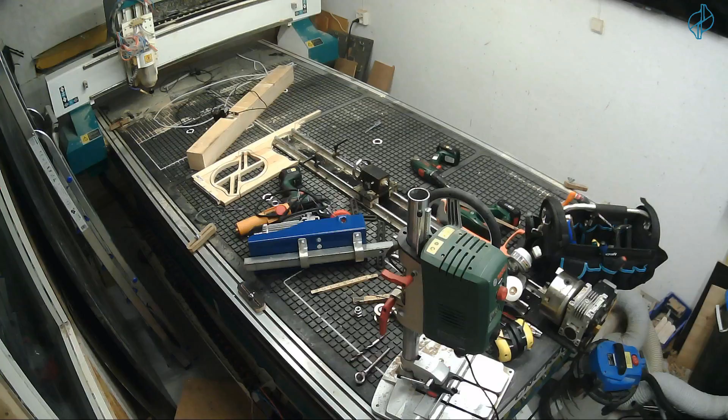And this is my CNC machine at the moment. It's kind of messy right now, but it's a huge CNC router. It's able to cut sheets of wood, plastic, or aluminium with the size of 2.4 by 1.2 meters, and 20 centimeters height. So it's able to cut pretty large objects. That comes in handy when you're making furniture, because you want to use an entire sheet of wood or plywood, or MDF or something, and then you can make huge objects very easily.

So let's start fooling around a little bit with the CAD program first, and then we are going to go from Fusion 360 over to the CAM software. First we draw it in CAD, then export it to a program called the Slicer. Then we take the DXF file we get from there and import it back into Fusion 360 and make the CAM files, the tool path for the CNC machine. Then probably tomorrow or something, we're gonna cut it out on the CNC machine. So let's go all the way from an idea to a real life object this time.

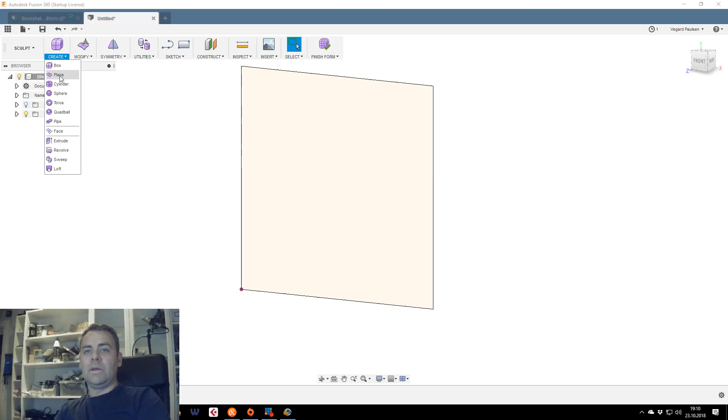So we are able to decide at a later stage what this object is going to look like, but for now let's just keep it at 80. I'm going to use a Sculpt tool called Create Form, and then I choose what I am going to draw inside. Now let's make a plane first - a 2-point plane.

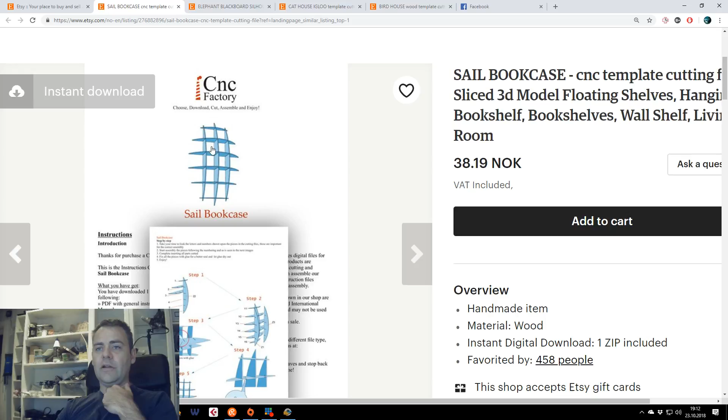So we are going to make a bookshelf. Let's find a bookshelf that's kind of similar, so you can get the idea. I'm kind of inspired by these kinds of structures—very nice bookshelves. They're pretty easy to make because they're made of interlocking sheets of plywood, so you don't need any screws. You can see in these drawings they just slide into each other like puzzle games. It's a nice, cool thing to make with a CNC router.

This is definitely made within the same program, probably the same way as I'm going to do it today. You can see these screenshots are actually from the Slicer tool in Autodesk, so they're basically doing the same as we are doing right now, except they're actually paying for it. I'm not. So let's start off

with, for example, a box, or I really want to have something with beveled edges. Just looking for a tool here. Yeah, let's go back to the first way of doing this. So I'll just draw a box, 80 by 80 centimeters wide, and that's, for now, going to be the size of my bookshelf.

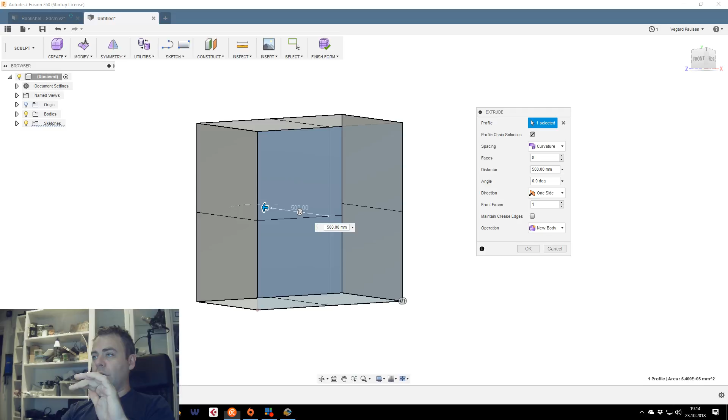I made a plane inside that sketch just to keep the dimensions, and now I'm going to extrude that plane into a box like that. I want that to be maybe no more than 50 centimeters in depth, because the bookshelf, at the deepest point, is going to be 50 centimeters from the wall.

All right, I'll just extrude that, something like that, and let's close up this hole. So we just select this and do one of these. I had some trouble earlier with one of them. So it's a closed box now.

Let's go to this side and maybe do some cool stuff—let's do bevel edges maybe, if we can do that inside. Merge edge. Bevel, there you go. So I want to bevel these edges.

The Sculpt tool is the tool I'm the least familiar with in Fusion, so this is very good practice anyway. Let's see if we can find a way to bevel these edges.

I know another way, but we can see if we do like this and edit form, and if we now scale this—it's really not doing what I want. I tried this an hour ago and it worked perfectly. That's how it is, there's always something.

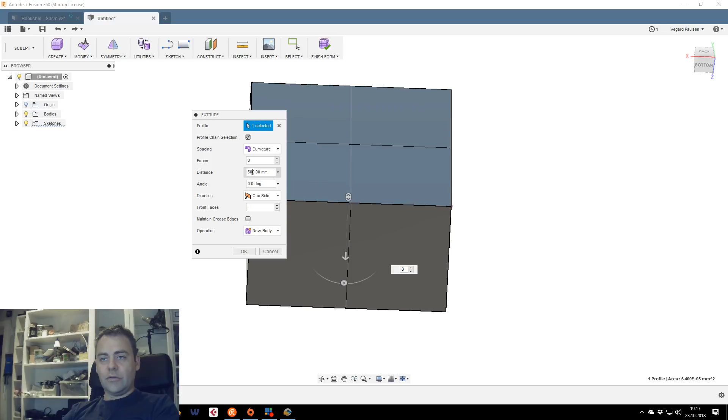That's how I did it. So I should really go back to before I extruded it. I went like this—I'll just extrude it a couple of millimeters first, so I get the spacing from the wall before I start the curve. I'll go, just for the fun of it, maybe 5 millimeters, like that, and then close up the back wall before I continue, because that's gonna make a mess.

If you have a form that's not closed up, when you try to export it, you will not be able to. So I will fill the hole, select the back wall, and do some sort of collapse maybe—yeah, that will work. Now I will take the front wall, do an edit form, and push the center point of the sculpt out to get the curvature I want.

I'm looking for the biggest movement right now, should be 300, should be like 450. It looks a little bit too much. Yeah, let's just try that for now.

And to get this to be a little cooler than just, for now we can actually just export this as is and see how it handles up with inside the slicer. Hopefully it will work.

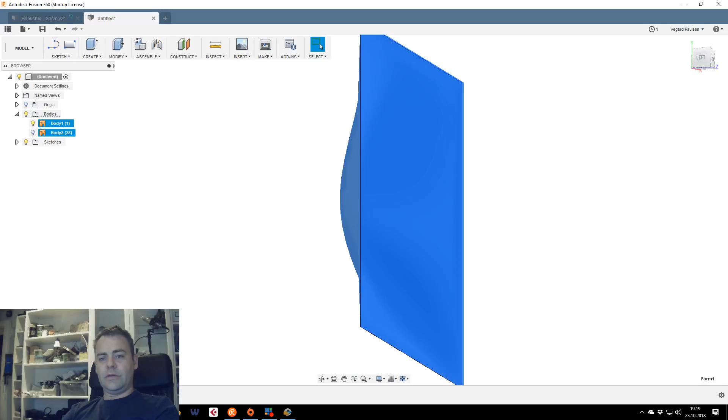Let's just try another time and close up the back wall then without that extrude. Fill hole.

Just have to check that my Facebook chat is actually showing up as well. Having some trouble with that today. So we are definitely live on Facebook, but there's no chat right now, but I'll just share this around it. Yeah, hopefully I will see if there's any more questions during the stream.

I really want to close this, but I wonder why I can't. Maybe I can do it now. So...

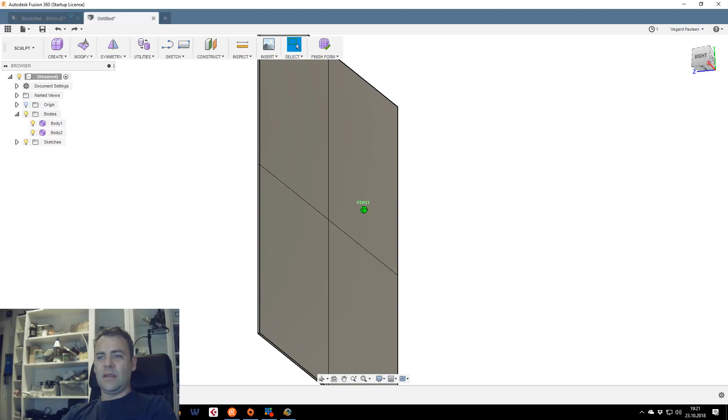When you do these kinds of modeling, there are better tools than Fusion, because Fusion is really made for technical drawings and sketches. It's really not made for soft modeling. As you can see, it kind of messes up pretty fast.

So, edit form. Let's go 45, maybe 50 centimeters. Let's go 50, yeah. So, and then let's close up the back wall.

Fill hole. Fail to fill hole with a given edge. That's interesting. Is that because the sketch is also visible? Maybe. Fill hole. I'll turn off the sketch. No, still the same problem.

So, this is weird. So let's start over. Let's start with the sketch.

Let's create a box, 2 point. Select which, these yellow boxes tell you which plane you are going to draw on, because you can only start on one plane. So I'll always start at the front plane, because that is how my CNC machine is set up.

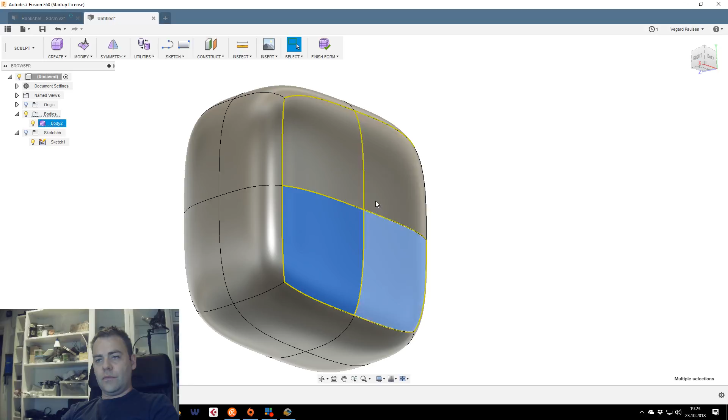See if I go, I can just select all and go - oh shit, I missed it. Let's just try this and go flat, flatten, 9 selected. Okay, nothing happened. Interesting.

I'm using the crease function instead. That will give me a proper flat back wall. Looks like. So now I'm almost there.

Now I can just work with my design to kind of give it a little more cooler look. Something like that maybe. Yeah, let's just see how that turns out before we go further.

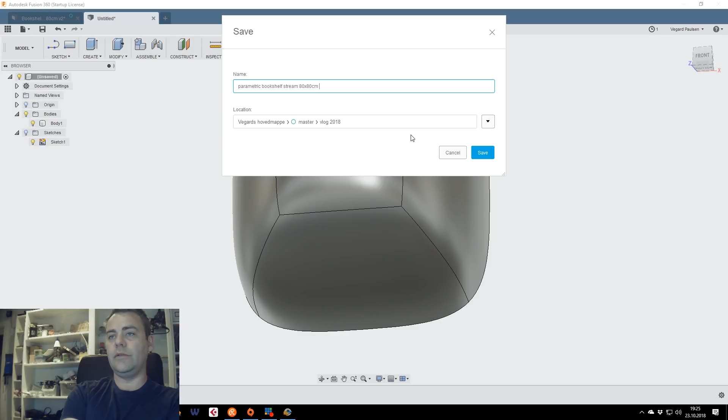So let's just call this parametric bookshelf stream. 80 by 80 centimeters times 50 centimeters, I think it was.

So, and now we go make, and then we go slicer. You have to download this slicer tool separately. It's available in the plugins page on Autodesk. You can see, you will find it somewhere.

So go make slicer, and then it basically generates an STL file with these settings, and it opens up the plugin, and hopefully it will import it properly.

Yeah, like that. So, and the first thing you should really look at is on the left side here, you can actually see that it's the size. It's actually trying to scale it as a default, and that's kind of dangerous.

So we're gonna keep the original size, and we're gonna use it in centimeters. 800 centimeters - that's a huge bookshelf. So let's go millimeter, 800 millimeters. Yeah, that looks more right for us now.

So we have our shape. It looks kind of boring right now, but it's going to be much more awesome very soon.

So, and the next thing we need to do is during manufacturing settings, you can construct a manufacturing setting that chooses the size of your material, the size of your sheet, like a wooden sheet for this CNC machine I have over here. It has a work area of 2.4 times 1.2 meters, so you can actually put a plywood or MDF sheet of that size directly onto that machine, and you can set that up in the software here.

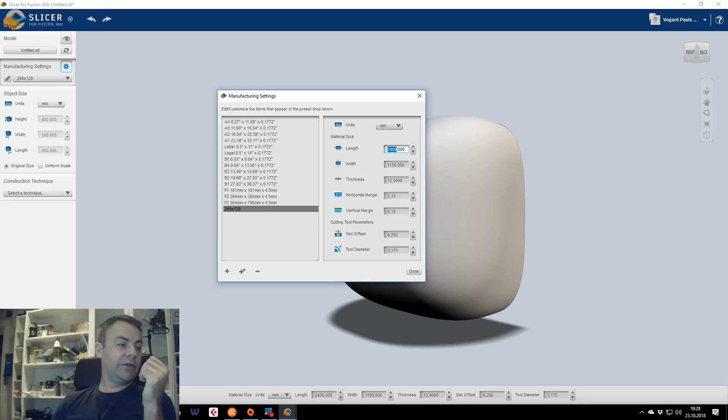Reese, I'll probably mill it tomorrow. As you can see, my CNC machine is kind of full of other stuff at the moment, so I need to clean it up and put in a large plywood sheet. I'm definitely not finished with the software part for a few hours, so I'll probably mill it tomorrow, hopefully, or the day after that. I'll try to let you know.

So 2.4 meters times just under 1.2 meters, and the thickness of the plywood sheet we are going to use is 12 millimeters. That's pretty important because it kind of decides how big the slice in the interlocking slice is going to be. Then you have the tool diameter, and I'm going to use a 3.175 millimeter bit to carve this out, and then I'm going to save it.

So now this slicer is ready to do some work. The first thing it tries to do is slice everything sideways. This is very cool if you have furniture you want to make where, let's say, you put spacers between all of these layers. You know, these are layers - I can show you, you can see all of the layers going off. You can see the blue lines at the top, that's where you can make holes, for example, for either a rod or a wire or something that holds all the interlocking slices together.

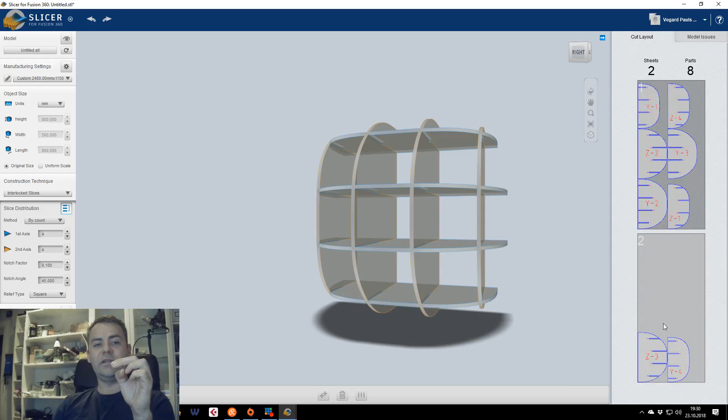So these slices, now it's looking like a bookshelf, right? So apparently, if you see on the right side here, you can see that it's using 2 sheets of plywood to mill out 8 parts. Those 8 parts are now ready to be interlocked.

Interlocking is when, if my one hand is going like that and it has a slice in it, and the other hand has a slice the other way, they kind of fit together, and then it's rigid. It's very rigid, and you are able to mount it without using bolts or screws or anything.

So as you can see now, this is the instruction manual on how to assemble it. You start with that slice and that slice and that slice. You can also see this is cardboard, where you can see the plywood version. This is very close to how it will look like when it's finished, because I'm going to use birch plywood, and that has a very similar look to this.

And you have a good question - it's very feng shui, yeah. It will be mounted onto a wall, and that's the last part.

After I'm finished with the design, I will have to take these DXF files on the right side here and put those back into Fusion 360 the hard way. I have to import the DXF, then extrude it all over, then draw all the holes for the mounts, because this program is only made to do one thing, right? It's made to slice up your 3D objects into sheets. It's not made for CAD drawings, it's not made for CAM. Its only purpose in life is to slice up things in very cool ways, and it does that very well.

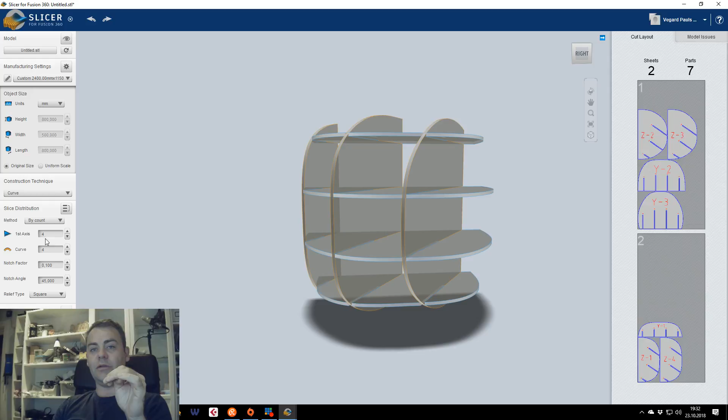But it's kind of a... One thing I was really missing when I started working with this was a way to actually send it back to Fusion and keep all the 3D parts without doing it the hard way through the DXF. But well, you can't have everything. So this is another shelf.

It will be very hard to get to the back shelf. With the back here, it's kind of hard to reach whatever you want to have in there, unless you want to hide it. In a way, it's kind of nice to hide.

You can actually rotate everything as you want, and if it goes red, then it says we are not able to assemble or mill this out without messing it up. So let's go interlock slices, and of course you can change where everything wants to be.

So we can go by distance. You can...

One thing I definitely want this to be is milled out in one sheet of plywood, because one sheet of furniture quality birch plywood is kind of expensive in Norway. It's like less than 50 euros, so maybe 45 euros or something.

So if you're going to use two sheets of plywood to make one bookshelf, it's going to get expensive. A hundred euros just in material, and then you have the work time, maybe an hour of milling, then the assembly, and probably you have to paint it somehow, maybe a clear coat or a color. It kind of gets expensive very fast, but at least you're going to get the design you're looking for, and that's definitely going to cost more than any IKEA design.

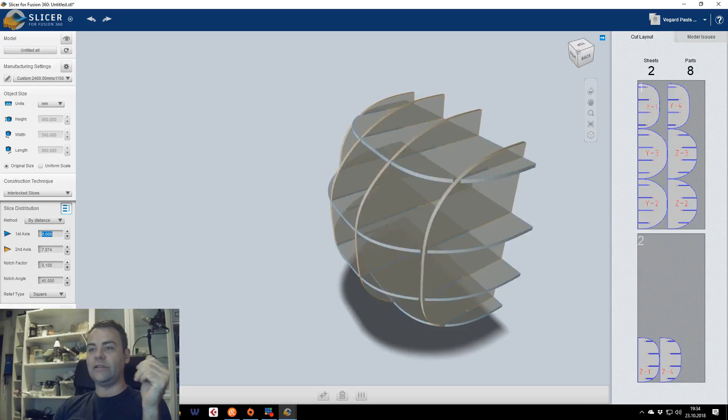Yeah, custom is always custom. You will not find this on IKEA, at least not this design, and custom will cost more. People kind of struggle to understand that, because they're so used to paying so little for furniture. So as soon as they start talking about making custom stuff, it's like, wow, is it that expensive? Well, of course it is, at least if it's only a one-off, it's gonna get expensive.

You know, the hours you use making the first part, the drawing, the design, the testing, the prototyping, that costs some hours of money, and the material costs some, and then you have the run time on the CNC. But it's really getting interesting as soon as you go down to a CNC machine and start milling stuff out.

Then it gets interesting, because you can make more parts fast, and you can optimize your CNC machine to go faster. The tool paths can be optimized, and you can hire a guy that runs the CNC machine day in and day out making parts and parts and parts, and then you're looking into getting the cost down.

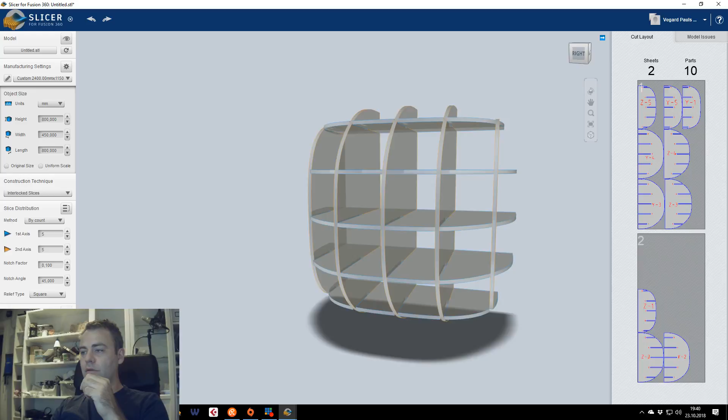Yeah, almost. Let's make it a little bit higher. Let's make it, or we can increase the width, maybe. Let's increase the width to 120. That's the typical 1.2 meters. Whoa, 1.2 meters wide bookshelf. It's definitely bigger, but you have a lot of space for stuff.

Let's make it a little bit shallower so it doesn't look like a huge something on the wall.

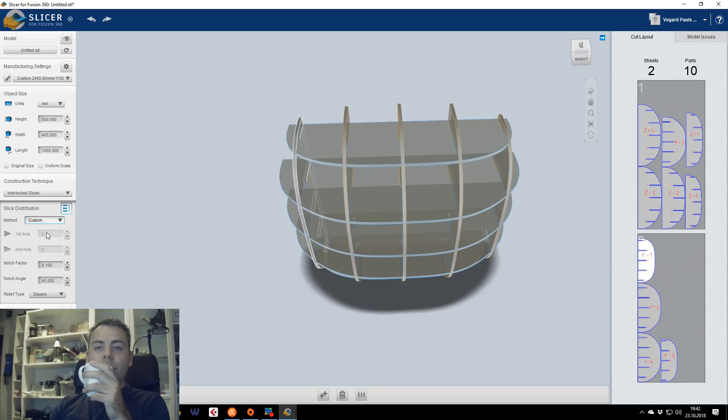So the one thing I'm trying to keep an eye on is how many sheets of plywood I would need, and you can see that on the right side. I really want to keep the cost down. I don't know, is it going to be flush against the wall behind it? Yeah, it is.

The inspiration from this design is all over the internet, I guess. You can find these shelves on Pinterest and everything. It's something like this, and this is much bigger. I can see, if I would guess, this is probably over 1 meter high, probably like 120, maybe, and then is it half that size in? Yeah, almost half that size, so 60 by 120 maybe.

And the depth, how deep is a book? I should have a book here somewhere. I can just measure it out. Then we can probably guess how deep the bookshelf should be. I thought that typical bookshelf was around 40 centimeters deep, but I might be wrong. It might be smaller, 20 centimeters. All right.

That looks really neat in action. Yeah, it does. It's a very simple design, and I really like the look of it. And you know, you can make any shape when you do this. When you do this yourself, you can make any shape inside Fusion 360, and then you can adjust it, well, slice it afterwards.

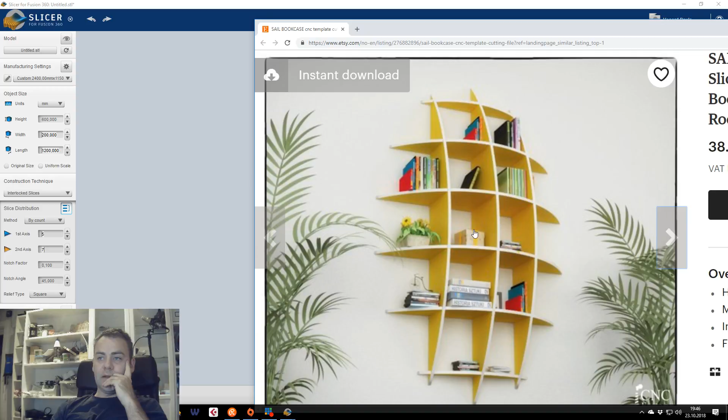So let's try out some other sizes. Let's go down to 60 in height, 600, and then up to 1200. And then let's put some more slices into this. Let's have a look at this one. So this is mounted vertically, and it has 3 slices horizontally, and 1, 2, 3, 4, 5, 6 slices vertically. Let's see if we can do something similar, 3 times 6, and let's have a look at this vertically.

We can even try to look at it from the same angle, if that's possible. The orientation of this kind of gets messed up. You're not able to view from all sides always, but it's not willing to let me view from that exact angle. Well, you'll get the idea, I guess.

Come on, why is it restricting some of the 3D spaces? So where did it go? There it is.

But you can see this is more of a perfect sphere. It has a curve, looks like it's just a slice of a ball. It looks like mine is more of a box with some beveled edges on it. So mine is going to get a little bit fatter, if you know what I mean. The curves are not going as far, but I kind of like it.

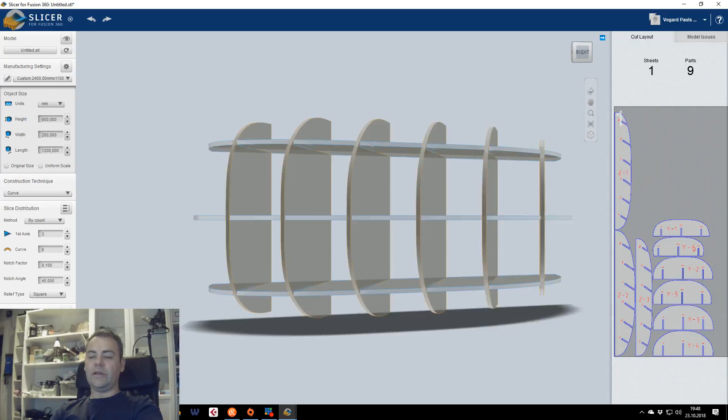So in the direction, this gets kind of trippy. You are able to make a lot of cool stuff that way. So let's see it from the front.

So let's just play around with this a little bit. I wonder if I should... Yeah, I stopped wondering now, I decided. So, close. Do you want to save it? No, goodbye. This was another one I played with earlier. So you can have a lot of different types of structures and forms.

So let's just make a new one. And I guess that we want to make a 120 centimeters times maybe 60 centimeters. Or is 60 too small? Well, that is not...

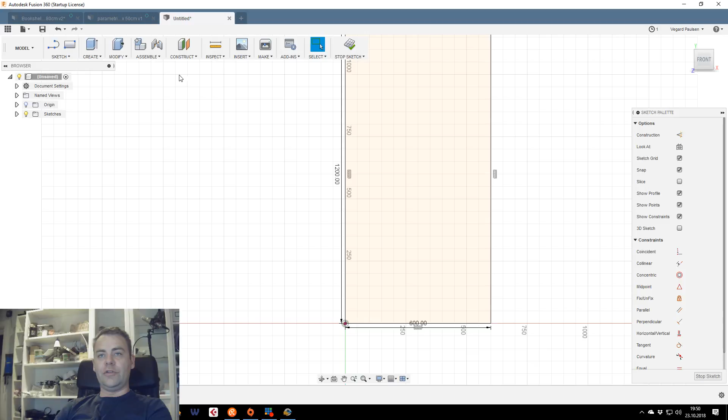So you have a parameter tool inside Fusion, change parameter, and you can save your measurements. So you will say shelf underscore height, and millimeter, 120 centimeters. So, and you go shelf width, and you can go 600 millimeters, and you can go shelf depth, and you go, yeah, let's do 25 centimeters then. Just a little bit over what you suggested with 20 centimeters.

And you can actually use this inside everywhere inside the drawings. You can go per shelf height, enter, and you can go shelf width, enter. And for example, if you were to make a 3D object of this now, you can go extrude, and then you go shelf depth. The interesting thing about this is I'm always defining everything I'm doing.

So if I'm making an offset here now, just to make a shelf or a hole in this design, if I do my offset by, for example, 12 millimeters, minus 12. It still did 12. It should do minus 12. Come on, let's do it one more time.

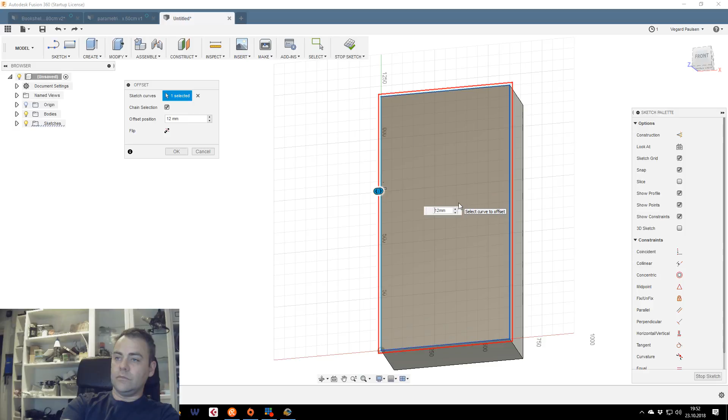Just going to use some time to show you this function because it's really nice. So my minus 12. Come on, why doesn't it... Have they changed? I'm really not sure why I can't offset this. Let's try it again. Offset.

Come on, I want to offset this solid by 12 millimeters. Okay, then I make a hole, and that hole should be the shelf depth, minus shelf depth, sorry, to be able to cut it. Then I have a hole.

So the interesting thing here now, because I used the parameters, the parametric design, to decide almost all of the design, only the offset is constant. Everything else is able to change when I change the parameters.

So if I go here and say, well, the shelf depth is going to be bigger, I want it to be 600, you can see the entire design takes that into account and changes. So if, oh shit, I want this to be 80 centimeters. Cool. I want this to be 200 millimeters. So my entire design, I'm not struggling to do all this every time I change the design. I can just go in and type in the new numbers.

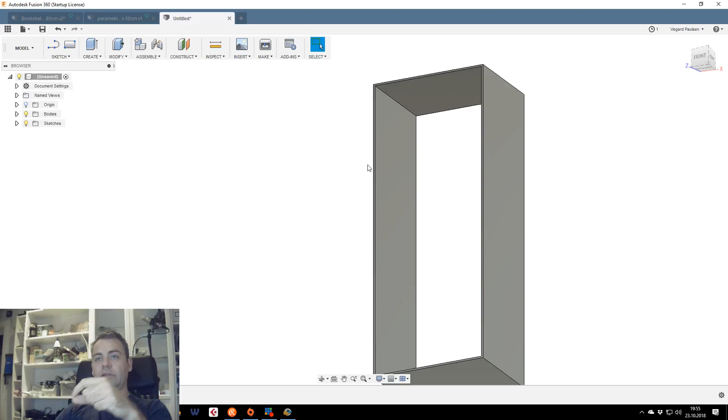If you've been smart and programmed in the thickness of your material from the start, every time you use the design, you'll be able to change the thickness and the entire design will adjust to that new material thickness, or a new bit size, or whatever. I'm not going to use much more time on that now, but the parametric design is very, very interesting.

So that's a distraction there, but cool. It's pretty cool.

Of course, you have physical materials. You can kind of represent how this will look in whatever.

And then you can go render. The stream, I actually have some stream drops. If I render this in real time, sometimes the stream drops out, so if it drops out right now, don't freak out. I'll just try to real time render it. Looks like the stream is stable.

So for every iteration it kind of improves the render, or you can render in cloud. But that's really not what we're here for.

So let's go back to our box. I really want to make a form, and I have to push the right button. Damn it. Create form in that plane, and I want to make a sphere.

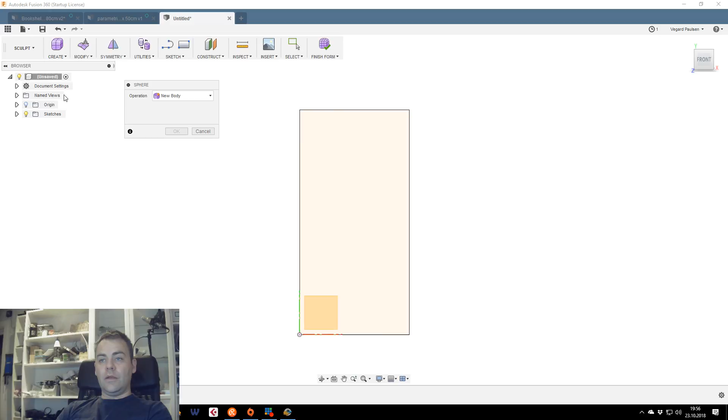New body, sure, in that plane, and we want to center it, so center on that plane, holding shift and finding center on the other. Now I have center both ways, and I'm kind of making a sphere now.

I'm wondering how I should cut this out. I haven't done this before, but it's going to be cool, I guess.

See if you can see - you kind of see the same dimensions on the sphere that they used to make this perfectly circular shelf, and now we're doing kind of the same. What I really want to do now is make a solid.

This is interesting. So let's just finish this and go back into the sketch, and let's extrude that. Sorry, let's use the parametric design.

Shelf depth - oh, I need to change that. So shelf depth to... come on, hello. So 25.

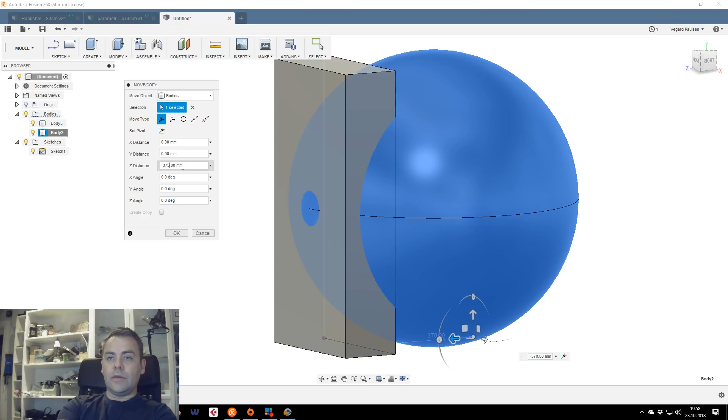That's actually perfect. So something like that. How do I do this?

I want to use this object as a cutting tool to cut out that slice. So you have something called combine, and that is actually a cutting tool as well. You select your target - that's my target, that's the piece I want to cut in. And then you choose your tool - this is my tool. And I want to intersect like that, yeah, I want to intersect this sphere and only keep the parts inside that.

But before I do that, let's increase the width of our shelf, because you can see it kind of caps off the sides, and we really want the sides. So to be able to keep this diameter sphere, we need to increase our width. Let's do that first.

Now we can use our parametric design for this. So let's do shelf width and increase that to maybe 80 or something, 800 millimeters. Should be able to see that instantly.

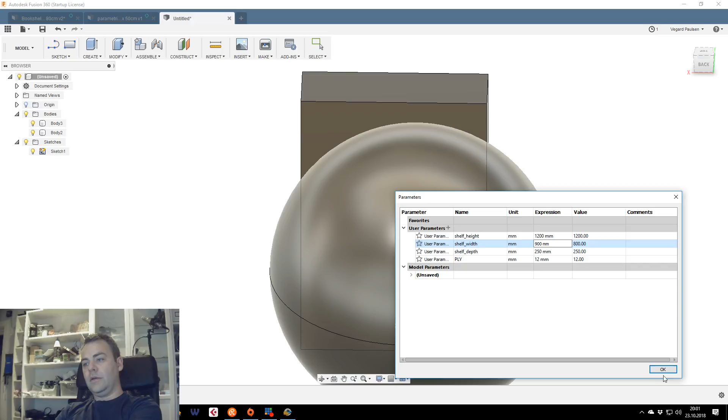Still not getting the entire sphere sideways, so let's increase it a little bit more. Or we could decrease our sphere, but that kind of caps it in the height as well. It makes sense - it's a perfect sphere, so it should be as high as it is wide, unless it's going to cap somewhere. So let's go 120 by 120 then.

And then move it once more.

Yeah, now we're getting somewhere. Let's see the bottom side. Looks good, that looks good. Yeah, this will be awesome.

So this is just used as a cutting tool, so we can even call it cutting tool just to make sure. And then we go sphere, and then let's do the cutting. So let's turn off the sketch so that you don't see that ugly frame.

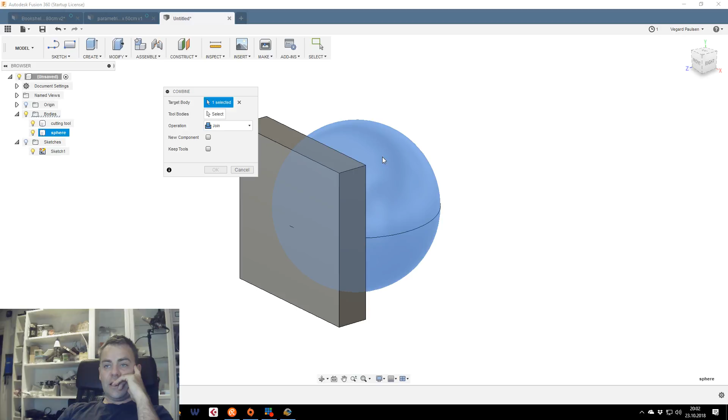So we go combine, and then we select our target. We're going to cut this sphere, and we are going to use this square as a cutting tool, and we are not going to cut because that would remove all of the inside of the square, but we are going to intersect it. So we make a new part, a new component, and we are going to keep our cutting tool. If you don't check that box, the square will actually be removed.

So now we can hide our box, and we can hide our sphere, and we are only left with this. This should be exactly what we want.

Now we are able to save this, and we call this bookshelf sphere, 120 centimeters. I always try to write down as much information in the file name as possible, because after a week you kind of forget everything about what you did there, and instead of looking it up, you can just see it in the file name. It's a good practice, I think.

So I don't want to save this. So we have our components. Let's send that to slicer. Go make slicer, and then we select it and make sure we select high refinement, because that's the amount of meshes or details inside our object. So let's have a look at this.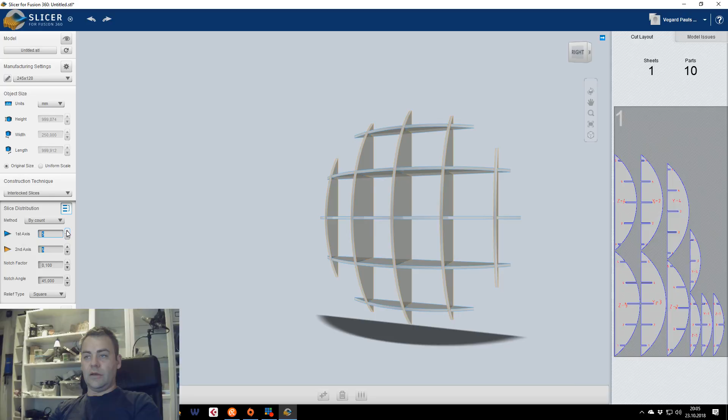So let's do the slices down. Oh, we have one sheet now. That's nice, almost getting there. You can see these outer slices really should be connected so things don't fall apart. So let's do some more slices in the height. This is really starting to look like that one.

Yeah, be back in an hour. Or if you want to see the CAM part of this, I'm really just finishing up the details on this, and the next thing I'm going to do is make a DXF file, a 2D DXF file, as you can see on the right side, and I will import that back into Fusion, and then I will extrude all the elements again, and then I will start making the CAM process. I think you're kind of interested in that, so you might stick around for that, but probably half an hour or something. Maybe sooner, or you can just rewind the playback later if you want.

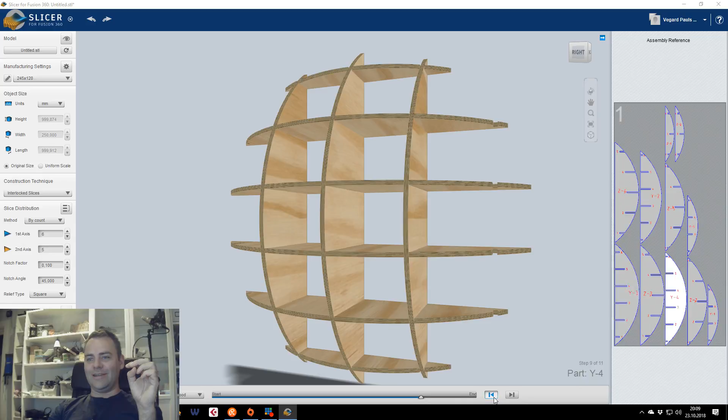So this is how it interlocks, you can see it slides. And I want all of this to be dog bone. Do you know what a dog bone is? A dog bone, you know how a dog bone from Donald Duck looks like? Dog bone, it's, come on, dog bone.

So a piece of bone from a human being, that's a bone, right? You can see those curves, that's a dog bone - that's why they call it a dog bone. So when you carve out stuff with a dog bone structure, to be able to get all the way into the corner with a round tool, it's never able to cut a perfect square. Can we agree on that?

This circular cup is never able - if I push this hard into something, the shape that forms will be a sphere, a circle. It will never be a perfect square. And normally when we design something to fit together, we want things to be a perfect square. But our cutting tool is usually somewhere between a 2 and 10 millimeter bit spinning around fast and milling into the piece of material. That's why we use something called a dog bone.

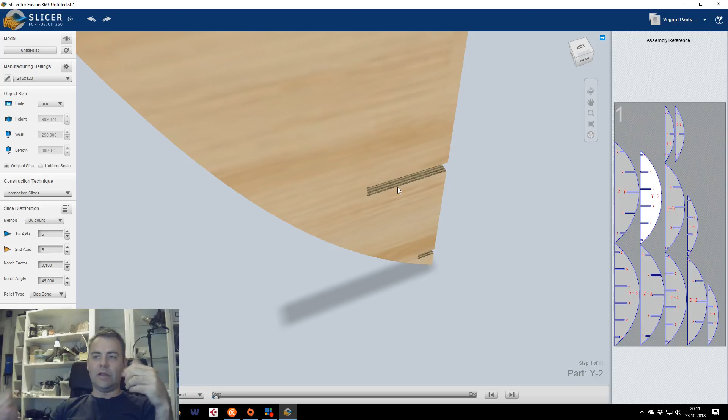This is a dog bone - well, not the best example, but I'm going to use dog bones to get all of these slices properly cornered off. You can see if you zoom in closely here, you can actually see the dog bone. The preview function on this isn't good enough, I guess, but there are some dog bones there. You can see that it cuts into the corners, so that when you start interlocking things, they fit perfectly.

Ah, there's a dog bone. You can see it curves - it mills a little bit longer than the square corner.

So this is the shelf now. It's kind of starting to look like something. It's able to assemble without using any bolts or nuts or anything. Maybe a little bit of glue would have helped, just to make sure it doesn't fall apart when people start pulling at it. But it's starting to look like something. Maybe we should make this in acrylic or something - that would be cool.

See-through acrylic, yeah, anyway. So at this moment this bookshelf is 25 centimeters deep at the deepest point, and that's probably around here. It is 1 by 1 meter in size, so you'll need a decent size wall to fit this shelf. But when this is actually working, you'll fit a lot of stuff on your wall, and that's the point of having shelves, right - to be able to store all the stuff you don't have room for anywhere else.

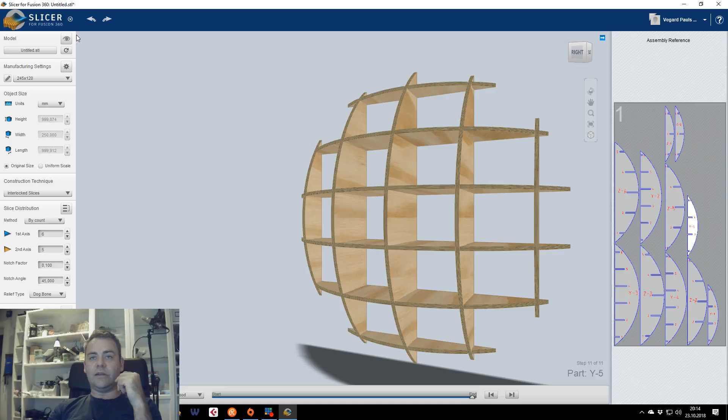And that's, yeah, let's have a look on how we're doing that. Let's just save this now, save it to my computer, and put it in a folder. I always use Dropbox for my stuff. So let's go vlog CAD folder, and let's call this sphere bookshelf, 1 by 1 meter, 25 centimeter depth, 12 millimeter plywood thickness, and the most important thing, 4 millimeter bit diameter.

That's because if I change the bit diameter later, the dog bones—the holes inside the corners—won't fit anymore, because the bit size will be bigger and it will carve bigger holes. It might take off that back part and it gets wobbly, and everything goes to not good places. So these are the plans for designing.

You can export this as a PDF, for example, printing it out on cardboard and cutting it out. Or you could do an EPS file if you want to use Adobe environments, like Illustrator, to continue designing. Or we're going to use DXF, which is what I use, because most CAD and CAM programs like DXF files very much. DXF is a 2D format drawing—it's vectorized, so you're able to select all the lines and extrude things easily.

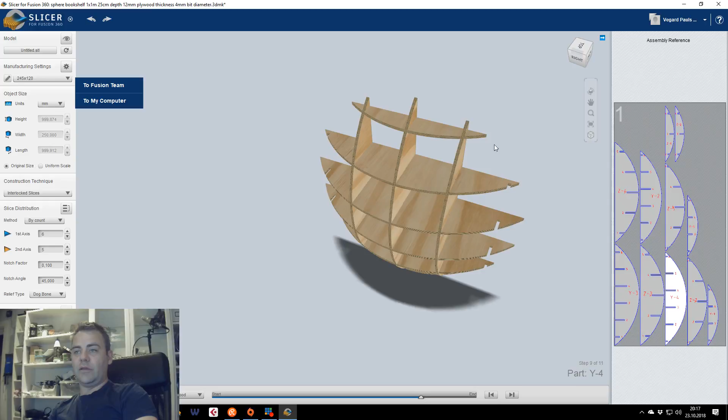Let's just have a quick assembly look before we close anything here. This is how it looks from the front. It's missing a couple—there you go.

Let's do it from the start. The first thing you place is the vertical left, then you go bottom horizontal, then you go from bottom up on the horizontals, then you continue from left to right on the vertical, and then you take the two on the sides as the end, and then you have your bookshelf.

But a good question now would be, how do we mount this on the wall? Unless you have a crazy looking wall, this isn't going to hang there by itself, so we have to make some mounting brackets of some kind. I have no idea how to do that yet, but I have some ideas.

Maybe just make some holes for mounting brackets if we can find some, and let's put them where they are the least visible when you view this.

So if you hang this on the middle of the wall and your wall is at least 2.4 meters high, half of that is 1.2 meters. If you center this on a typical living room wall, it will hang 1.2 meters from the ceiling and 1.2 meters from the ground. If you're a normal person—I'm 185 tall, so I'll probably see this from a bit of an angle, up to down. If you're lower, you'll probably see it from the low side. Most people, I guess, will see it a little bit from the top.

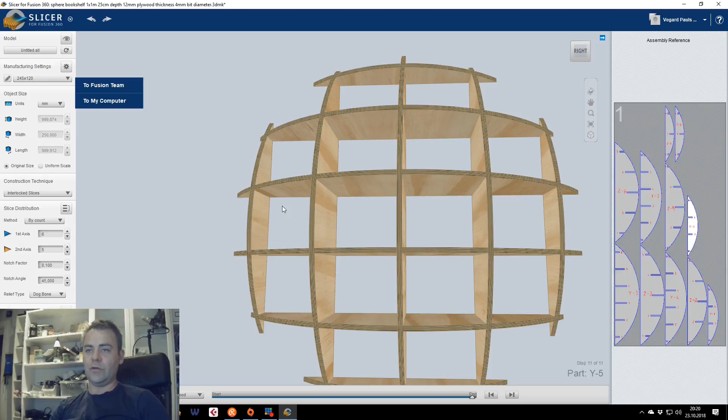And if you have enough of those—maybe let's at least do the center one. What's the center one? There is no center one, it's two center ones. So we should do the top one probably, and then the bottom one. Is that enough? Let's mount it.

Yeah, I do have a 3D printer, let's see where I have it. Let's see if it's on. Oh, it's dark in there—it's not on right now. It's in another room, and it's so dark there you can't actually see it.

But yeah, I do have a 3D printer and I could print this right now, but I clogged up the nozzle with some plastic the other day, so I have to clean it first. This would be a nice thing to just scale down and 3D print—scale down to 1/10 or 1/5 size or something, then print it and see how it turns out. But you can see that pretty well here as well, how it looks.

Yeah, so let's go further on. The next thing now, unless they have changed it. No, you haven't.

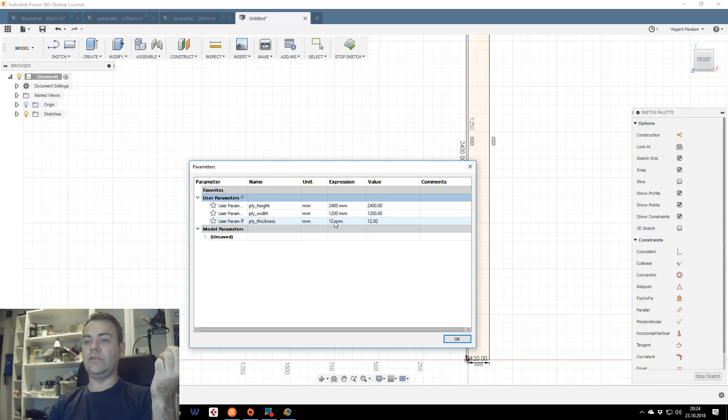And ply thickness, 12. That's important because when I go out in the garage tomorrow and measure my material, sometimes it isn't actually 12 millimeters - it might be 11 or 10 or 13, depending on the manufacturing process and each batch of material. So it's really nice to change this parameter when you know what the material is.

So I go bit size 4 millimeters. This is a really nice way to look up your own design if you forget something. Ply height, and then ply width.

So this is a sheet of plywood, right? To be even more cool, we can just add something like a pine look to it or something. Oh, I need to extrude it first, so let's extrude that to ply thickness. Oh, that looks ugly.

It's definitely not that. Where is birch? Yeah, that's better at least. And now I am going to call this body my stock material, or just stock - that's the term for the piece of material you are going to carve into with your CNC machine.

So that piece of material is going to go up on my CNC machine, this one, and it's going to be carved out when it's ready. It's probably not going to be ready today, but we'll see - maybe an hour's worth of cleaning the garage before I'm ready, and I have to get the plywood into the garage.

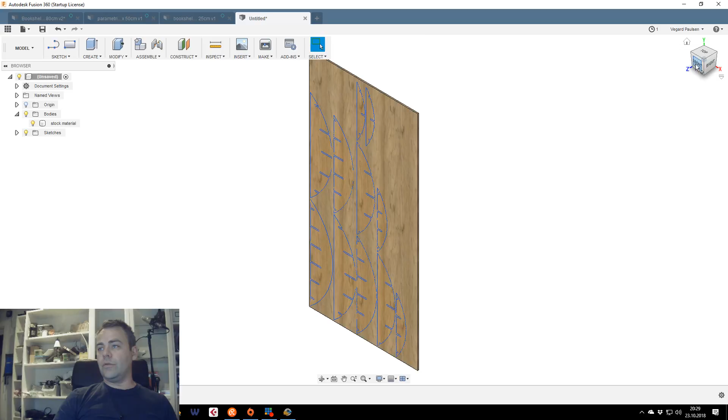So I could either extrude all of these elements and make a new 3D object with all of these parts inside Fusion to continue working on the design.

Or I can draw the holes for the mounting. I think for this prototype, I really shouldn't design the holes for the mounting plates right now because I don't have those yet. It makes more sense to just leave it without mounting holes and try out a couple different mounting fixtures, and when something works, you can go back and put in those holes.

Then you can make many shelves. You can make a lot of these very fast. In a day you could probably make 10 or something, I don't know. It all depends on how much time it takes to carve out.

You see there's some space left here for other stuff. We can do some other cool stuff with that. Just for the fun of it, we can import another SVG file into there. Oh yeah, sure.

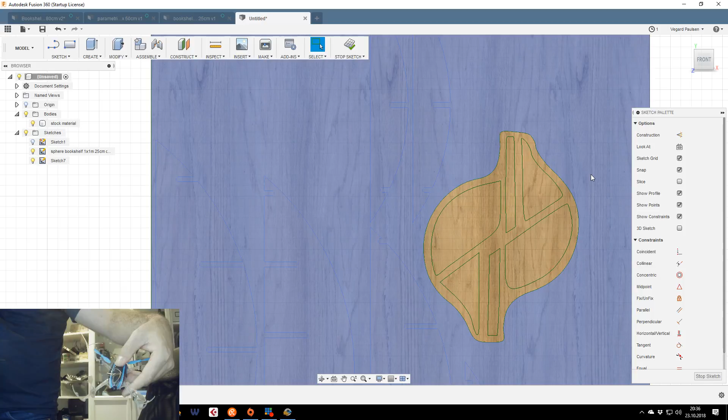Do I have a drone on my shelf? I have a lot of drones on my shelf, actually. Which one? This one, or this one, or this one... I can go on for hours. This one is a pretty cool one, this is a racing drone. It goes incredibly fast, it's a 4-cell racing drone, a 210 frame, so it's 21 centimeters from space to space. These ones are pretty cool to fly indoors. My cat loves these. This one has a camera in front, and this doesn't.

Oh, I scared my cat now. If you want to say hello to my cat, you can, she's all the way down there somewhere. We're not able to angle that camera further down. Cat cam. She loves playing with these drones.

Yeah, let's get back to it. You're not supposed to eat it though. So let's get back.

Yeah, the black one, that's the racing drone, that's correct. So it looks like, in terms of cat size, something like that. I have some bigger ones as well, I have a DJI Phantom, and where's that huge one?

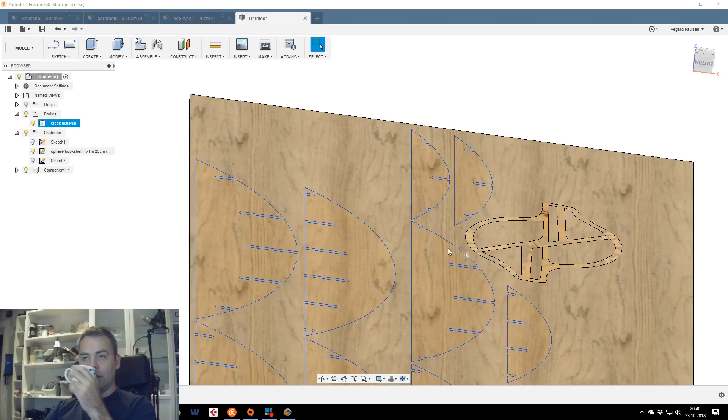So I'm going to do extrude, select the bottom. I can just type -12, but it's the same. Select the bottom, and it will create the thickness. Actually, I should really not do it this way. I should really undo and do it all over with the parametric design, because that's the proper way of doing it. Undo, undo, undo.

Yeah, there you go. So let's just deselect this, just go select these. Come on, this. No, not that one. This is bugging out sometimes. And this, and this. Yeah, and this.

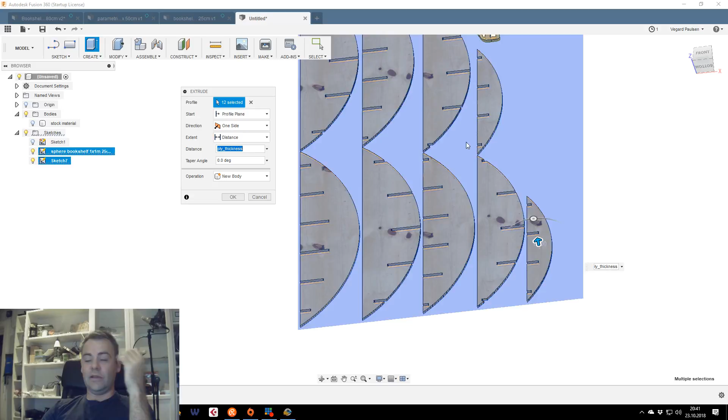This is one of the reasons why we use DXF files, because DXF files actually have closed designs, just like a vector file, like an SVG file or something else. So let's just do E for extrude, and then now the interesting part: we use the ply thickness from the parametric design. So if I change the ply thickness in my design up here, then all of these will actually change as well. The only problem I will run into is that the thickness of those slots are actually drawn inside the slicer and not inside Fusion, but everything else should be alright.

So let's just do it like that now. And then I probably have to type negative instead of positive, because it's not going to lay above my stock plate if I go positive. So it should go minus ply thickness. And then, hello. Yes. And then I do new component, and then I do OK. And now it's either going to make one big new component, or it's going to make like 15 new components, hopefully 15 or something. But it made one.

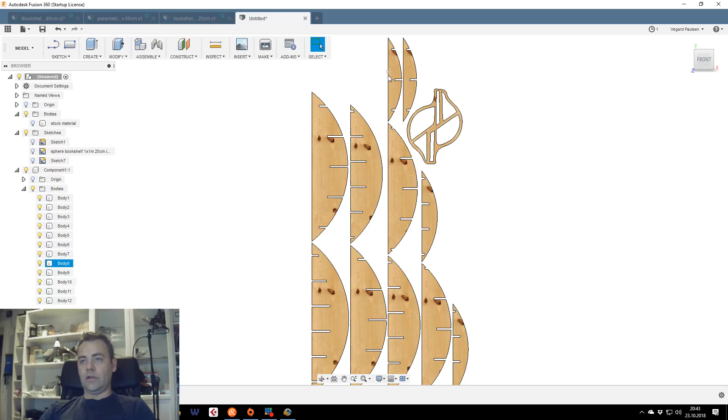Well, I can split that later, because there's a lot of bodies in here. I can just make components, right click, create component from bodies, and then you have the entire thing, but we really don't need that. So what we just did, we made all of these parts from a 2D file and back to a 3D file, and now it's getting ready to be worked a little bit with the CAM toolpath. I should really move these two down here so I get all of this plywood to spare for something else. So let's do that. So where are those?

I really think that Autodesk should work on optimizing the placing of this. If I do like that, I can just flip it around. It kind of fits perfectly in there almost. Just have to make sure the space between those two materials is more than 4 millimeters or they will cut into each other when the tools come passing by. So that should be good. And that's the last one, that's body 10.

Let's move that down here. And let's reintroduce the stock material so I don't put it outside of my material. And it should be at least 4 millimeters, 325, 6, all right, yeah, it's okay. It's better to have a little more than too little. So now it's getting somewhere. So this is body 12. I'll move that down here if I'm able to. It's getting a little bit close.

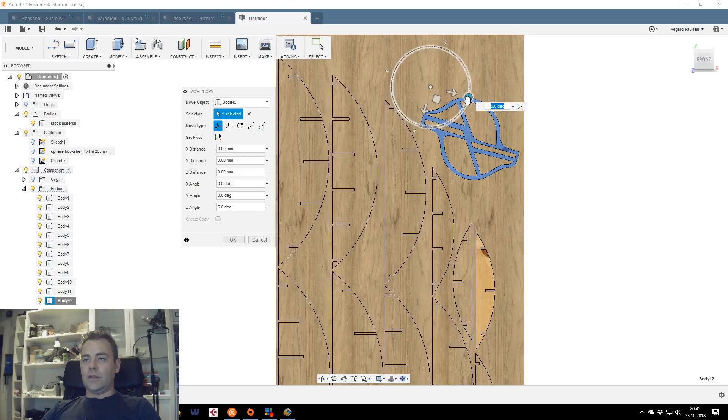Let's just rotate it a little more maybe. This is just like playing Tetris. You just have to optimize the space you have without compromising on the structural side, because when you start cutting a lot of holes, a lot of stuff into a piece of wood or whatever, at some point the entire sheet will collapse and just be destroyed. It depends on how you mounted it to the CNC machine, but I use a vacuum table so it gets sucked down, but when you punch enough holes through that plate, the suction of the vacuum doesn't hold the sheet in place anymore, and then it comes loose and makes a lot of mess, breaks everything, and probably kills someone. So you really want to make sure you also have clamped it down with some physical bolts as well as a vacuum.

But this looks okay for now. And now you can see that we kind of optimized. We have a lot of sheet material left here so we can use for something else. And I could do this for hours and optimize. There's a lot of empty space here that we could use. Probably even could fit that one almost. If we just slide the other ones a little bit down, maybe we can...

Where's that one? Body 8. We could just push this maybe down there. And then we have even more space available. So there's the edge, 193. Yeah, this should do it.

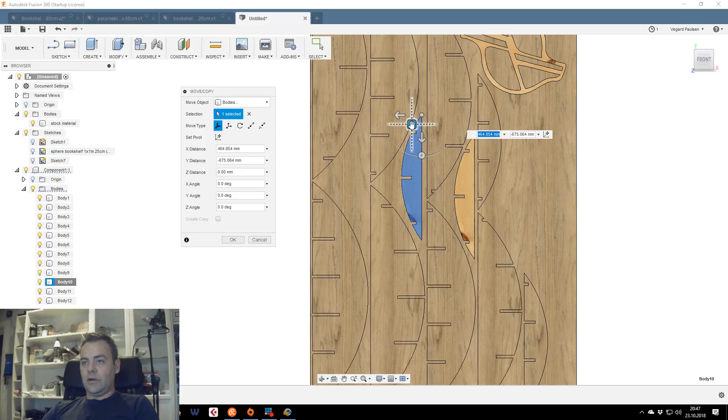Yeah, we'll see that when we go further on with the CAM process, we can also see if the bit is crashing. So that is body 10, move body 10, rotate first, and get it in there. Yeah, just in the middle there. Perfect. Maybe that looks a little bit too big, but we can try.

Body 5. Let's rotate and move. So, 485, no sorry, 486. There's enough. Yeah, should be enough. Cool. Even more space, more material for other stuff.

You see, if I would have made more than one shelf, I could probably easily fit at least half a more shelf on this plate or sheet, and then on 2 plywood sheets I would make maybe 3 shelves, and then that gets costs down a lot, right? So the less material you use for more amount of components, then you kind of get the cost down.

You can sell things cheaper. And we always like to get things as economically, as good as possible, and not throw away any more material than we absolutely need. Because of both the environment, the cost for the customer and for yourself, and there's actually a lot of pain in the ass related to removing the material from the machine.

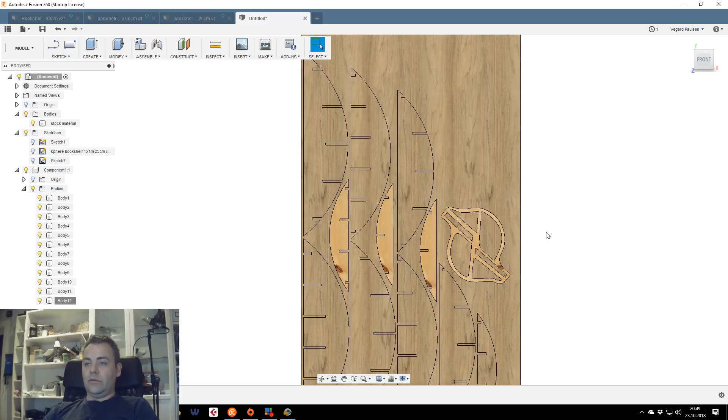Driving the material down with a... I have a hanger on the back of my car. What do you call that? Yeah, like a hanger on the back of the car. You put all the trash on it and drive down and actually pay money to throw that away. So there's costs, time, and environment to try and keep the amount of waste material down as much as possible. And that's always nice to think about.

So this is kind of starting to look like something. We can still work this out for a lot more time, but for now, let's just save this into, let's call it sphere bookshelf, 12mm plywood, cam. Let's call it a cam, because that's when I start looking for the cam files, when I have to change something, the feeds and speeds or whatever.

So the next thing I'm going to do now is create a setup, and this is where you tell the CNC machine what to do. So I'm going to make a setup now, and I'm going to tell this setup that I'm using a solid, and I'm going to find that solid. Come on.

So where is my stock material? There it is. So I already defined the height, the width, and the depth of my material when I made the stock body, and now I'm using that stock body as a default setting to define the outer spaces of my CNC machine working area.

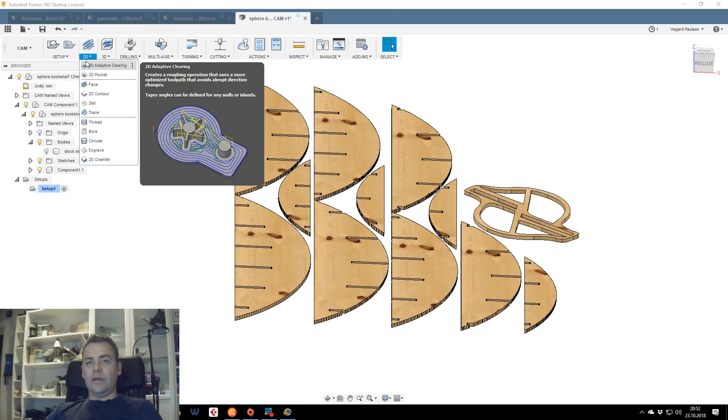So that's everything I need to do to set up the CNC machine, to be able to start working on the material, on the components. So I will probably, this looks like a very nice routine for a pockets tool. You can either go to the tool paths, and then you have to select all the outer or inner lines of what you want to mill out. I can show you. Or you can do 3D adaptive toolpaths, and that is a different way of thinking in Fusion 360, where you're not going to select all of the material you are going to carve out.

You're only going to select with 3D toolpaths what you don't want it to carve out, because it's doing some smart algorithms to try and do most of the brains for you. Unfortunately, that's not always the best solution, because then it works out the fastest way of doing it and not

the smartest, because sometimes the parts come loose and so on. So let's just do 2D contour CAM toolpaths for now. The first thing I'm going to do is set up a 4mm end mill. That's what I'm going to cut this with. I'm going to go down to 4mm, and we'll just leave the feeds and speeds for now.

We're just going to select all of what we are going to cut out. So we are going to cut out this and this. And I always select the bottom contour and not the top. This is the top one and this is the bottom one. If I only select the top one, it doesn't go into the material. So we have to go for the bottom one. So this one, this one, this one, and this one.

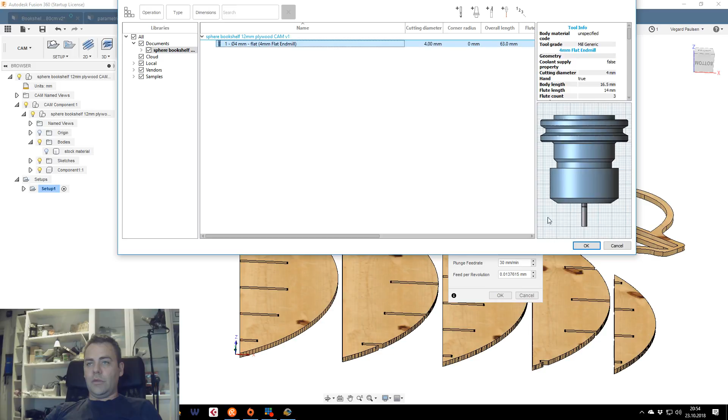And let's maybe just leave that one for now. Oh crap, I just cancelled all of it. Let's do it all over. 2D contour, select tool, 4mm, and then let's do all of these bottom ones first, so we can turn off the vacuum on that side of the plate when it comes loose.

So what happened there? Actually selected. So I selected OK, and you can see the blue lines are where the tool is actually going into the material and going around it. And you can see there's two blue lines over each other, and that means that it's going to do two passes. So it's just going to be a little shallower pass first, and then when it's finished with that, it's going to go down another pass.

And so on. Let's just duplicate this. Wait for it. You can see while I'm waiting for the duplicate, where I have my mouse, you can see this, it says T1 and says 31 minutes 12, so it's 31 minutes to carve out these ones. And that's before I've defined the feeds and speeds of the machine.

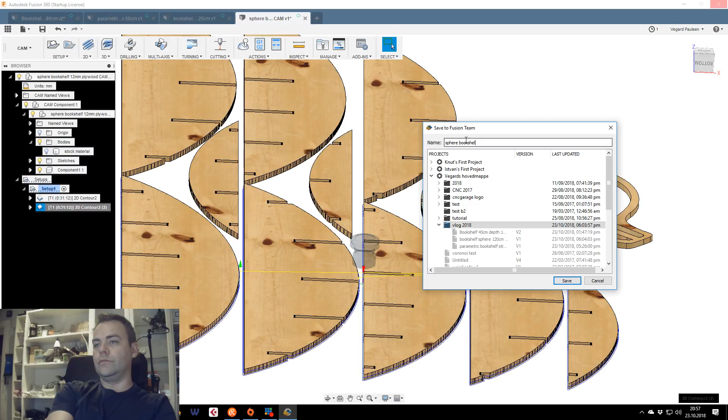So Fusion is a cloud-based software, and it has some positive and some negative sides to it. So

So let's continue and do all of these. This one, this one, this one, and the inside one of this, because this is going to, yeah, let's do this entirely separately.

If you carve out the outside of something before you carve out the inside, well, then the material will come loose from the CNC machine before you are finished with the object, and then you kind of destroy your material or your bit or both, and yeah, it kind of gets messy very fast.

So you really have to think of these things while you're doing your CAM profiles, and that's what I'm doing right now. So I'm planning on doing the bottom row of material first, and then the three in the middle there, and then I'm probably going to go further on to.

I just want to save this now because I can see that for some reason I'm using a lot of resources on something. My machine is properly spec'd. It has like 64 gigs of RAM, an Intel i9 CPU, and a Titan X graphics card, but still Fusion is kind of struggling sometimes.

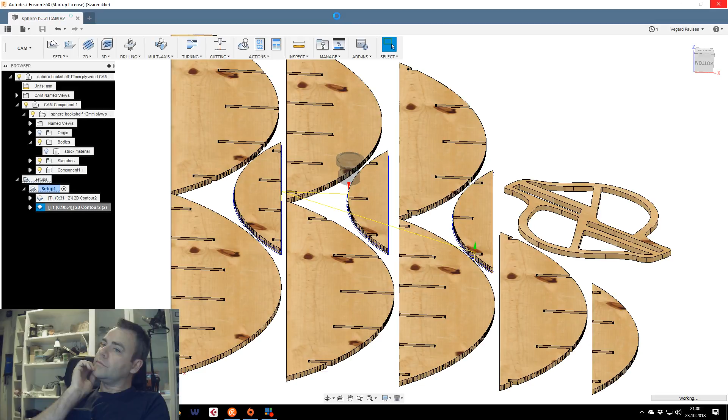Just waiting now. Maybe I should stop using the duplicate button because it's probably faster just to make a new preset and load the tool afterwards. I've never seen it take that much time before.

So if you just joined, we are making a parametric type bookshelf with plywood. I'm going to use a Norwegian type plywood that's very normal to use in these types of furniture, called birch, eller bjørk in Norwegian. I have bought maybe a truckload of those, so it's nice to use them.

So let's select the inside of this first, so the material doesn't come loose before you're finished. Only the insides, come on. There it is, and there it is. And when it's finished, then it's okay to carve out the outside.

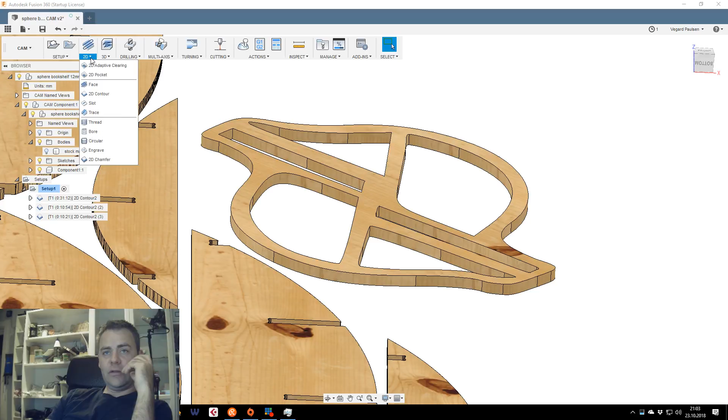So let's see if we can go faster. 2D contour, 4mm. Yeah, sure. This one looks like it goes faster. So, and then do the outside contour. Yes.

You can, if you look closely, if you have a full screen video up and running, actually see the times being calculated real time on this where I have my mouse now. You can see 31 minutes for the first, 10 minutes for the second, 10 minutes for the third, and right now it's calculating the amount of minutes for the fourth operation, the cam operation. The blue lines are of course where the CNC machine is moving.

Still waiting for it to finish. God damn it. It's finished. 3 minutes it's taking at the moment to run around those objects.

And then we need to carve out the top 3 ones. 2D contour, 4mm, yeah, sure. Then we need to select what lines to carve or mill out. The 3 top ones. It's the only ones left, I guess.

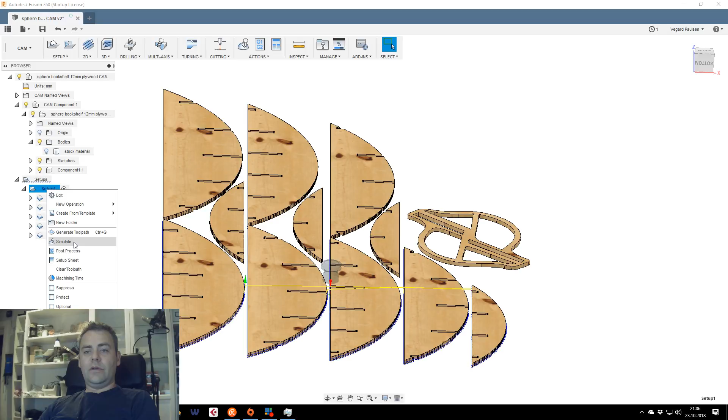So now we have done what we want to do. Let's show the stock material again. What we can do now is run a simulation. You know what a simulation is? It's when you, with the software, try to simulate what you're doing in real life. So this thing is the bit of the CNC machine, and we just want to see the flute going down into the material at this point.

I'm gonna make it transparent. We're gonna turn off our tool path, and we're going to make our stock look green, so we can see it much better. The first thing it does is go around this one, and I'm going to speed this up because this is kind of boring to watch. So this is in the order what the machine thinks is the optimized way of doing it.

I definitely don't agree on that. I think it would have been much faster to go from one side to the other, but well, it's just a few minutes difference. It makes a lot of sense if you're making thousands and thousands and thousands of these. If you're only making one and you're doing it on your spare time, it really doesn't matter if it takes 32 minutes or 33 minutes, but in case of a customer asking, of course every minute counts, so try to optimize everything all the time.

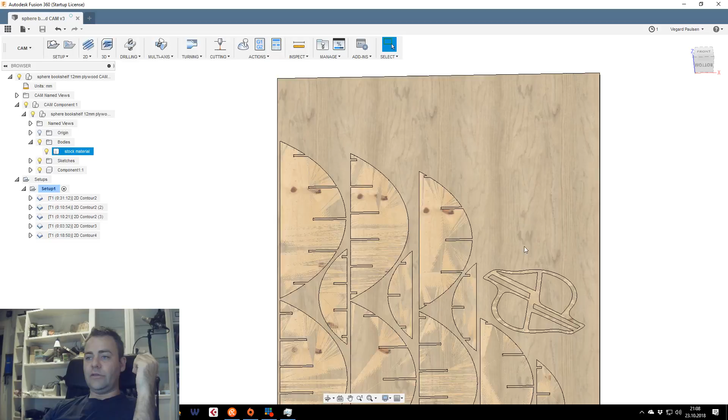It looks good. We still have a lot of space here for making something else, so maybe we should do some more thinking before we start milling. Maybe we should draw something else tomorrow or later, and just fill up the plate, make some more cool stuff in plywood.

So let's try and optimize this. We could see that it took almost 1.5 hours to do these operations, and that's before I started calculating what's the best feeds and speeds and all that. So we are going to do some math now, hopefully, if my application is still working.

There's a lot of good calculators online and on iPhones and everything that you can use to calculate the optimized feeds and speeds of your machine, the RPM of the spindle and the feeds for the machine, how fast it should move according to the spindle and according to the material you're cutting.

Looks like my favorite application doesn't work anymore because of the new iOS update, and that sucks.

So I got another question on the chat. Hey, did you custom build your CNC? No, I didn't. I ordered it from China and it arrived in a huge box with a mobile crane.

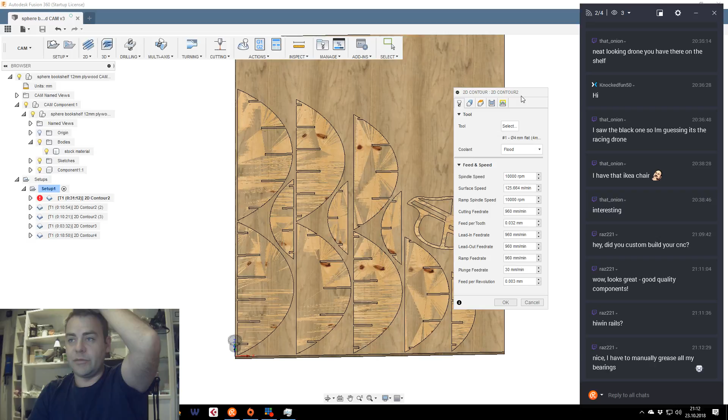Yeah, it really sucks to manually grease your rails. But I still do that manually from time to time just to make sure nothing gets rust on it, because everything corrodes easily, especially those China steel things.

So, feeds and speeds - if I remember correctly, I can run around 18,000 RPMs with 3,500 millimeters per minute for a 4mm bit. I will do the math later on, but for right now we can just use that as a default.

Actually, we can set that up in the tool itself, so we can apply it to all of it. 18,000 RPMs is the fastest speed on this machine, and the fastest move feed is 5,000 millimeters per minute, but I'm taking it slow because it's a tiny bit, and when you move fast with a tiny bit, the bit bends, of course.

It resonates, and that doesn't make a clean cut. So I'm trying to make a clean cut for the furniture, and that's why I'm keeping the speeds down. I'm actually considering doing it even slower than that.

So let's do something like this for now. Plunge speed is around 800 - I'm not plunging anywhere anyway, so when I'm finished. And it's just a 12 millimeter sheet of plywood.

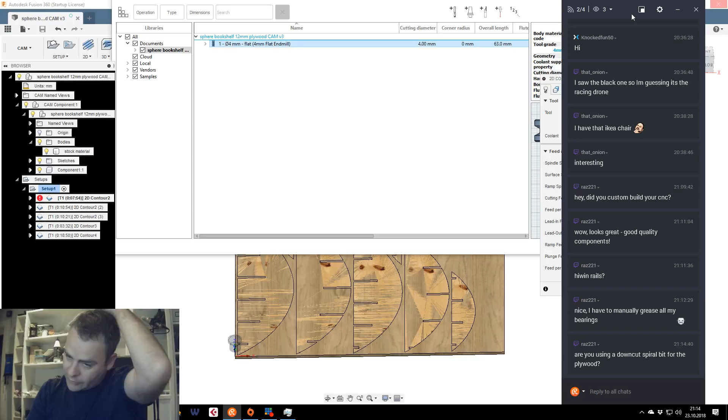Are you using a downcut spiral bit? No, I'm using a normal bit, not an upcut and not a downcut, just a straight flute for this.

I'm not sure I have a straight flute right here right now. Maybe in this bag, actually.

This is just for demonstration purposes, for anyone who doesn't know what we're talking about. This is a 10 millimeter end mill, and you can call this an upcut bit, because when you turn it clockwise it pushes the material upwards, and that kind of pulls the material. Every time you turn down into it, it pulls the material up, and that sucks when you're trying to hold something physically down on the machine table. That's why sometimes you use upcut bits to get material out of deep spaces, and you really have to struggle to keep things locked down then.

Sometimes you use downcut bits that do the opposite - they push the material down into the machine, and it keeps the material locked onto the table. But for this I'm going to use a straight flute, 2-flute straight bit, 4 millimeters, so it's not pushing either up or down, it's just staying there. Then you just have to make sure you remove all of the debris - that has to be removed somehow during the process.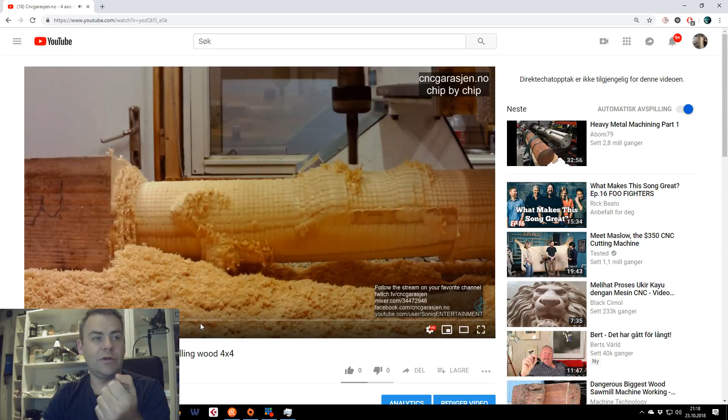I'll just go a little faster - this was like a 3-hour operation. First I used a 10mm end mill, then I went back with a 4mm upcut ball nose mill, 2mm radius, and went back and forth repeatedly. After a while we ended up with a very nice looking woman.

Actually 2 of them - I made 2 at the same time, so you just divide them in the middle. But there's some plastic here as well, if you just go to the videos. Yeah, right here I'm making about 96 prototypes of this in HDPE plastic.

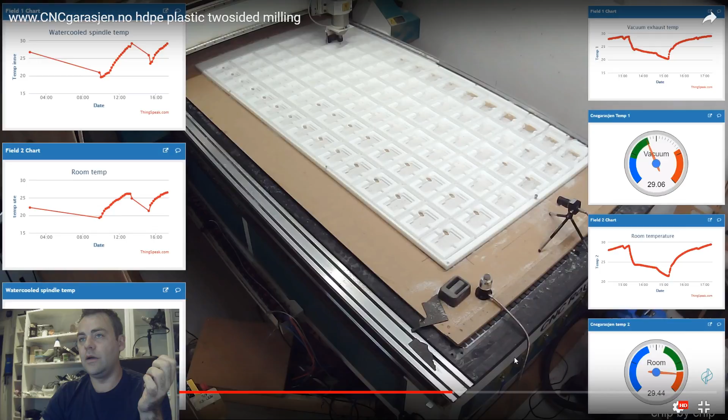This is probably the most slow television you will ever watch, but the cool thing about it is that the 10mm end mill removes so much material. I think I have some videos of it.

Come on, load - it's not loading. You can always put a 4th axis on your machine later on, you just need another controller, one that's capable of doing it, and yes, that's it.

So, hang on, just searching for the right video now.

This is actually pretty cool - you can see that this is held down by a vacuum, so it's only mounted by 2 screws in the end, and it's a 2-sided milling operation.

Hang on, where is it? Must be there.

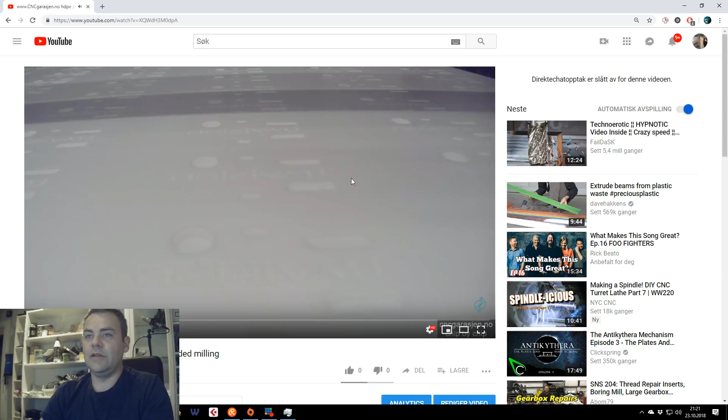It didn't leave much room in my control box for another drive. Also my power supply will need to be upgraded. Trust me, I just installed 4 contactors outside of my controller box - I had to put another controller box on the first one to be able to have room for it.

Really not finding what I'm searching for. Should be the one after that one then.

Yeah, I think it's this one. Look at the amount of material being removed here. I think I removed the dust bin here, so you can actually see it. Look at the chip flow going from this. Looks like water.

So this is 20mm of HDPE plastic, and I'm using this type of 10mm upcut end mill to cut plastic. You got the same dust shoe, awesome. You probably got the same dust machine as well. I have a green one, like a 2.5 or 3 kilowatts.

Look at this. Look at the chip flow here. I love this. This is when you can see the machine is doing properly what it's supposed to do. Removing a lot of material super fast and super precisely. Look at that chip flow. Looks like a water stream.

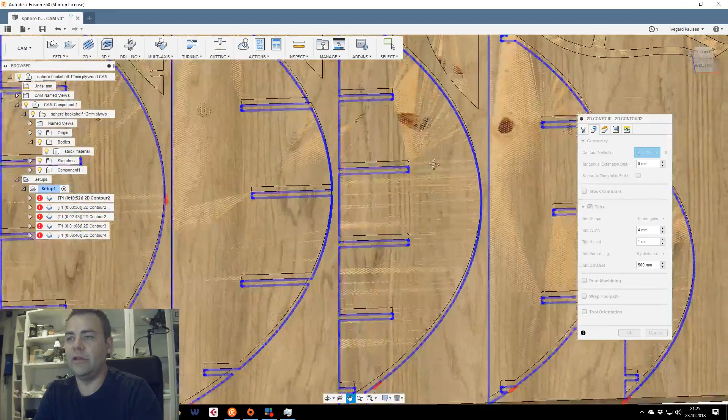As long as you don't use the dust removal tool to suck out the debris between your component and the stock material, it kind of helps keep the component in place until you remove it yourself. If you use the vacuum tool to suck away the dust during the process, the components came loose faster.

So I'm just waiting for fusion now. You can see the amount of time it took to run these 5 operations went down from 1.5 hours all the way down to 10, 13, 15, 16, 17. It's like from 1.5 hours down to half an hour.

So you cut mainly metals? I always have to use tabs. Oh, really? Do you use tabs on metal? Really? Okay, that makes sense, I guess.

What kind of machine do you have? I'm not sure you're able to put some links in the chat, but you can tell me what the name of the machine is, and I'll Google it.

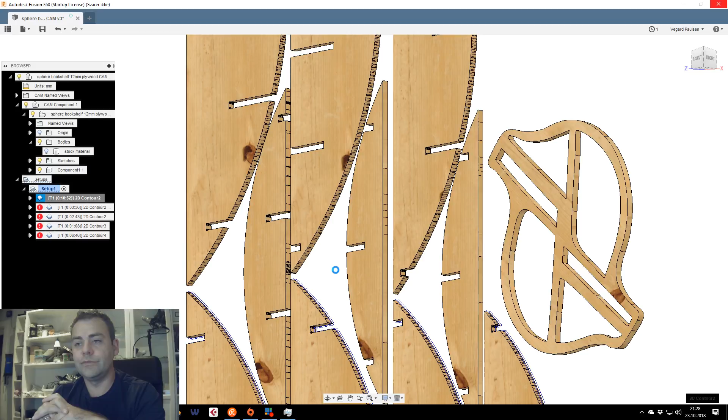My vacuum table is probably strong enough to hold these parts in place as long as the parts are big enough. They fill enough space on the table, then they get sucked down properly. But as soon as they become small as these ones, then it kind of gets troubly fast.

Yeah, just a hobby which pays for itself at the moment, but no page yet. See if I can find some pics. Cool.

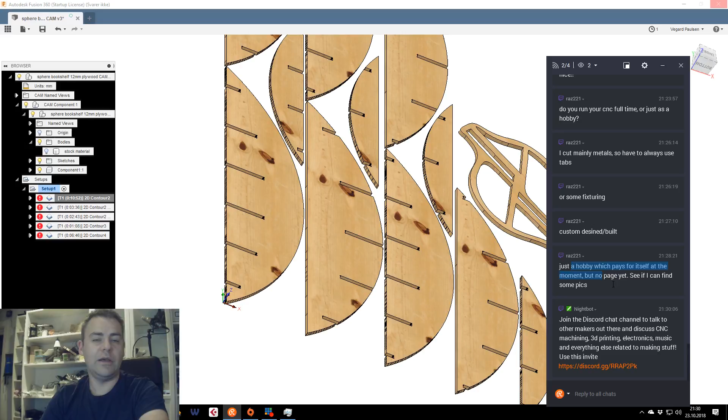This is kind of a hobby that actually does pay for itself. You're not able to run full time with these kinds of tools, but you are able to pay down whatever you spend on it if you're a little bit smart. But the most important thing is when you do something like this, have fun. That's why we're doing any hobby. As soon as it's not fun anymore, it's not a hobby, and then it kind of collapses on itself. Just make sure you're having fun while you're doing anything you want to do in life.

I really think I should restart Fusion because it's not supposed to react like this. I've never seen this before. I'll just do a quick reboot, save it, close it, and open it up again.

And now it's uploading. Fusion is cloud-based.

Raz, where are you from by the way? Are you from US or Europe or anywhere else? And what type of CAD CAM software do you use? Fusion like I do, or SolidWorks, or AutoCAD? So UK, awesome. Where in the UK, London or somewhere else? I'm located in Norway, down in a town called Fredrikstad, south of Oslo. But I do have a brother living in London, so let's see if we can...

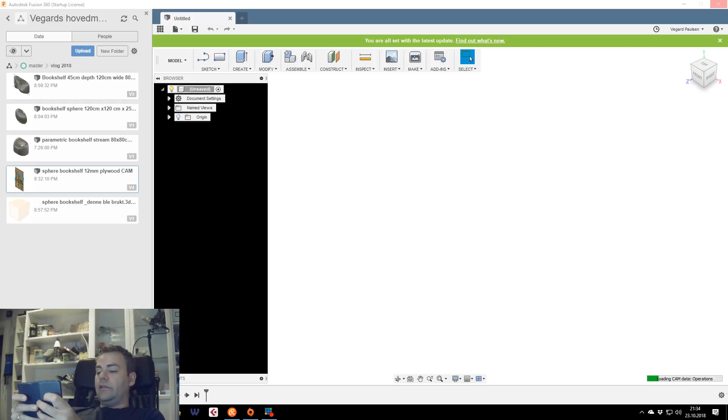So while we're waiting, when I do live streams, I run something called OBS, and I found a plugin for OBS that uses the NDI protocol. NDI is a NewTek network video protocol, and I installed a cool app earlier today that makes me able to use my iPhone as a camera. I haven't tried it on the stream yet since I just installed it, but we can try it right now. This should be my mobile camera in a second.

Well, that worked perfectly. It didn't work at all, actually. So why isn't it? I'm just gonna fool around with this for one more second while Fusion is loading. No, it didn't work. That's how it is with everything the first time you try it, I guess.

So the output is NewTek NDI, yeah. Resolution should go down, frame rate should go down. The bitrate is okay I guess. Let's try it one more time. Oh, there it is. Well, there it was. So this is live from my iPhone. The frame rate is horrible I guess.

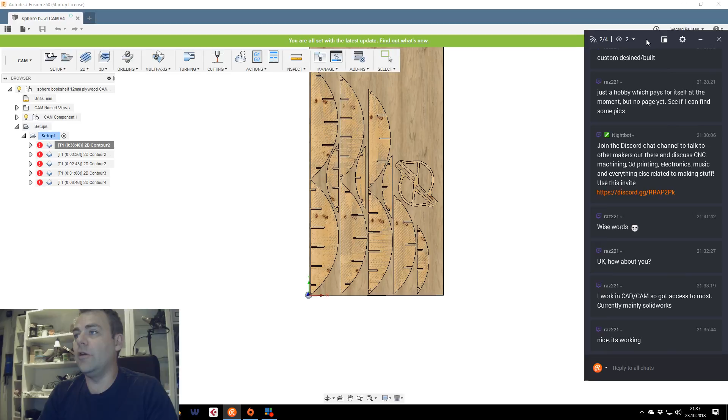Where are my tabs? I can't see my tabs. Let's turn off the stock material, see if we can see some tabs. Oh, if we decrease the distance between the tabs to maybe like 10 centimeters, that's like 100.

So I have been running this stream for 2.5 hours now, and I can feel my throat is kind of clogging up a little bit. So I think I need like 2 minutes of not talking. I'll just shut up for a couple of minutes while I do some work.

Design mainly, but as we manufacture in-house, there are so many cool tools. CNC mills, laser cutters, casting facilities. You probably mean laser cutters. And then you have casting facilities. Yeah.

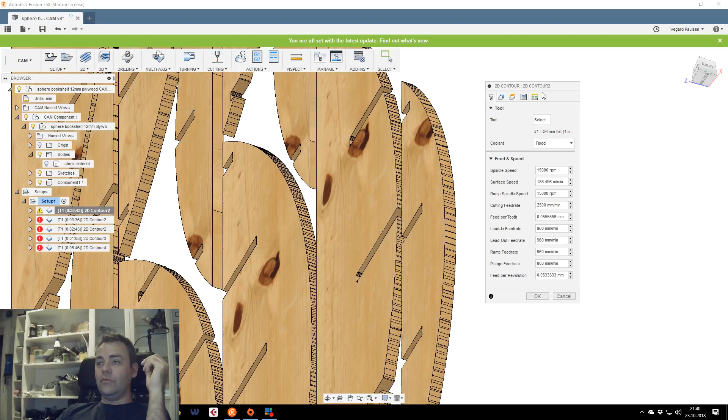I was actually considering buying a laser cutter a little while ago, but the cheap China-based CO2 laser cutters, like 100 watt ones, they kind of just work for a while. The CO2 leaks out of the glass container tubes on those laser cutters, and they stop working after a while when the CO2 is magically gone. The cost of getting a new CO2 laser tube to Norway is incredibly high. The tube itself, a 100 watt laser tube, costs like 5,000 kroner or 500 pounds, and then it costs another 500 pounds to ship it to Norway because it's fragile. And when it arrives, it only works for half a year, and then it breaks again.

Tabs. Where are my tabs? My tabs are missing. But I really don't think I need tabs on this.

Yeah, you need to have water so your throat doesn't get too tired. Yeah, definitely. I had 2 cups of coffee, but that didn't help at all.

Yeah, I'll just go grab some water while Fusion is clogging up. I don't know why I've never seen this before. Fusion usually works pretty good, but...

It gets even more expensive for VMC industrial CNCs. Paid 30,000 pounds for a new spindle - for a spindle, not a CNC machine. 30,000 pounds, that's like 300,000 Norwegian kroner, or maybe 400,000, for just a spindle on the machine. Jesus freaking Christ. My cheap 3 kilowatt China spindle on the upper left there, I think that cost like 5,000 or 6,000 kroner or something.

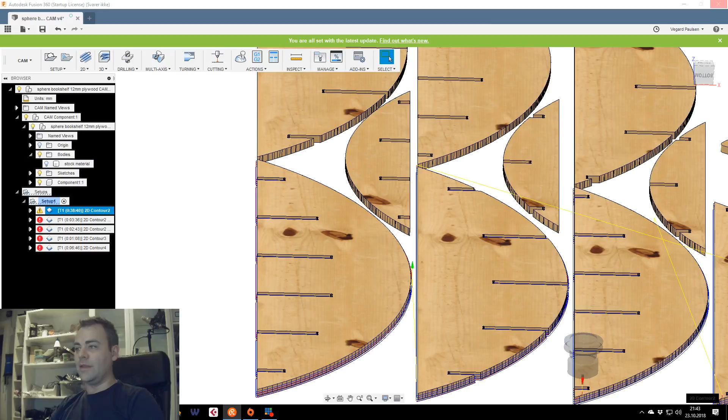Yeah, you have Brexit, so you're not able to acquire anything without paying huge amounts of money, I guess. They have the same in Sweden actually. When the MVA limit was removed - there's no lower limit anymore in Sweden - all the buying from China and places like that kind of collapsed, and people started buying locally again. The positive thing about that is you take care of the jobs, you keep the business in the country, and that's important, definitely important. Can never say that too many times, but unfortunately for the man in the middle, the guy doing this as a hobby needs to get his tools cheap.

I think I messed up my Fusion. I really think I need a reboot or something. Something is definitely going on here. It's not using any resources either, I think it's just a bug. Absolutely nothing. Crap. And I can't do a restart without reconnecting to the stream either, so I guess I'll be down for a couple of minutes while I reboot, if you don't have any other good suggestions.